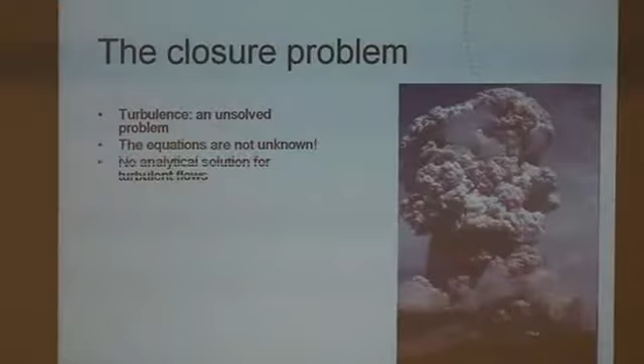Okay, I jump over some first slides. I think I will start by talking about the standalone linear eddy model. Some of you know a little bit about it, but I think it's good to have a background on that. And then I will continue with presenting the new model framework, which we call the LEM 3D. First, in a simplified version with constant density. Maybe we can look at some non-reacting test cases, but more interestingly also look into the non-constant density mixing reaction model.

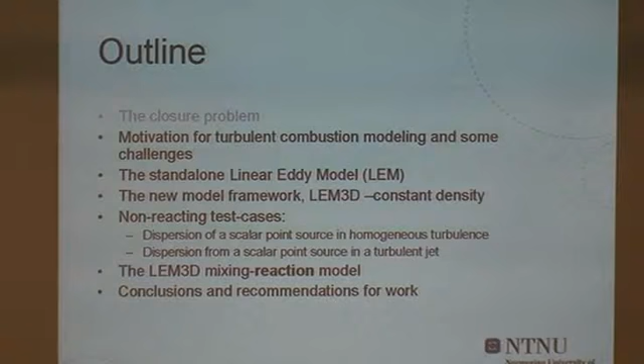So why turbulent combustion modeling? Okay, we can skip this one. Some of the challenges in turbulent combustion modeling you have already discussed. One thing is that the small scale structures are very important, because that's where the reactants are mixed and the reactions occur.

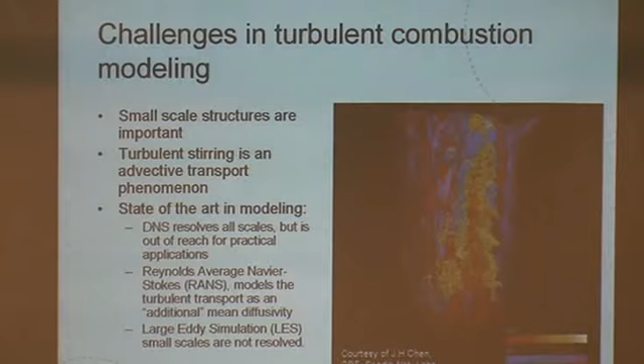Turbulent stirring is by nature an advective transport phenomenon, but it's often modeled as a diffusive process. So either in RANS, where you model the whole bulk transport as an additional mean diffusivity, or in LES where you resolve the larger scales, but the small scales you still treat with some kind of diffusive mixing or transport model.

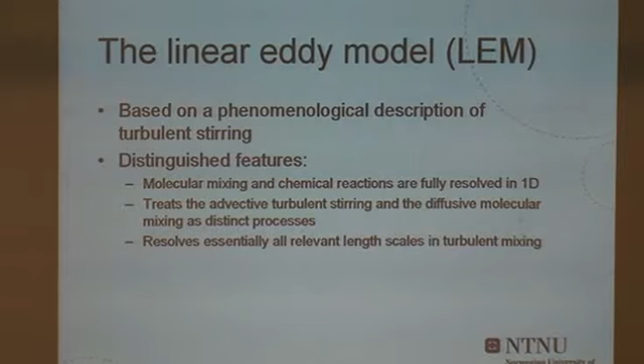So the linear eddy model, contrary to the standard models, is based on a phenomenological description of turbulent stirring, so it's not directly from first principles. But the distinguishing feature of the model is that molecular mixing and chemical reactions are fully resolved in one dimension, down to the Kolmogorov scales. And the turbulent stirring and the molecular diffusion are treated as separate processes. Essentially it resolves all relevant length scales in turbulent mixing.

So some more details on the linear eddy model. It has basically two main components. The first is the one-dimensional mixing reaction equation for a general scalar, written as this. What is phi? No, phi is a general scalar. It can be temperature, it can be mass fraction of the species. Is this D_m molecular diffusion? Yeah, that's molecular diffusivity. And the last term is a source term, so chemical production.

You don't have here flow, an advective term? No, the model has no advective part in its basic form. So that's something you have to add to the model. Oh, I see. But this is supposed to be calculated between mesh points, basically? Yeah, this is implemented on a regular 1D domain. But between mesh points in the 3D simulation mesh? Yeah, well, I come to that.

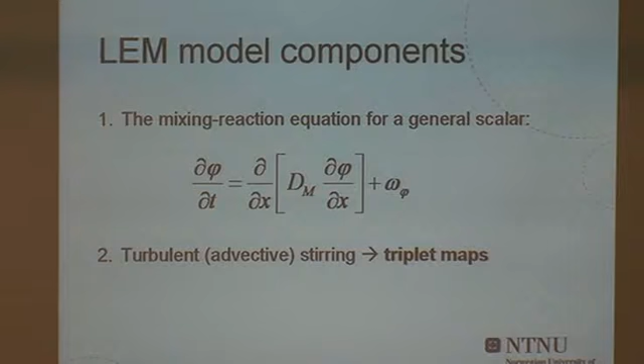The other contains some advective part, and this is the turbulent stirring. This turbulent stirring is implemented by so-called triplet maps, and I will explain what they are in the next slide. So imagine we have a linear scalar gradient, which is this black and red line, and we perform a triplet mapping on a section of that gradient on that domain. We do the following.

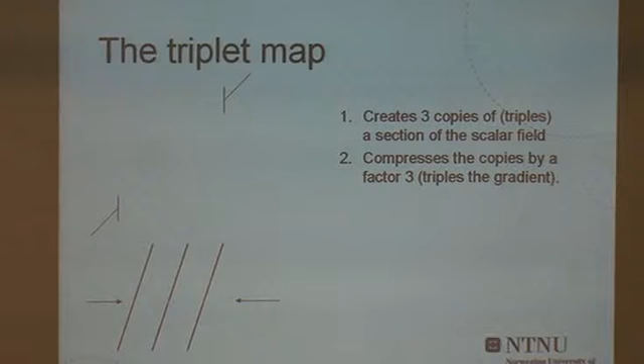We create 3 copies of a section of the scalar field, like this, and then we compress the copies by a factor 3. We triple the gradient, and then we invert the middle copy, and of course put it back again on the domain. By this we have a conservative mapping. It conserves the property that we have, and it's also continuous.

So in such a way you model the velocity field, which contains several components like rotation, shift, and others. Yeah? And they're independent random processes or what? In this way, you model the turbulent flow. Of course, not the large geometry-dependent structures, but what is in the inertial range and below is modeled.

But these ingredients like rotation, like shift, are they independent of each other, or how many random quantities do you have here? Oh, this is for a scalar only, no? Yeah, this is for a scalar only. For the number density, or whatever it is. A scalar.

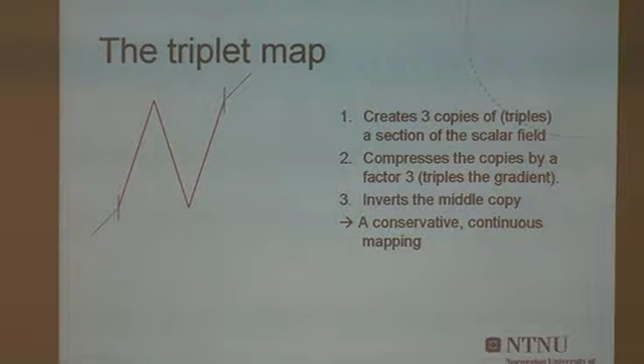So the idea primarily is to increase the scale. So the physical interpretation: increase the distance between the two points. So the shear layer is not infinitely thin, but it's thicker, and you adjust it to what you want in a conservative manner. So it emulates the compressive strain and the increase in scalar interfaces caused by three-dimensional turbulent eddies. That's the idea.

And physically, you have some history effects. In what way? The history effect. So in the linear eddy model, there is no direct history effect. There is a version of the model called the one-dimensional turbulence model, where you also have the velocity change. You do this triplet map with some frequency. What is the frequency? The frequency is dependent on the turbulent diffusivity and also the distribution of the eddies of the turbulence spectrum.

I guess you're going to explain that later or not. Yes, I will go into some details. Yeah, so therefore, please continue. So we wait. Okay, it's better to wait.

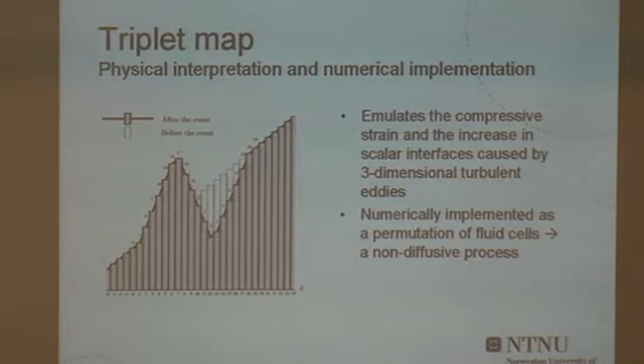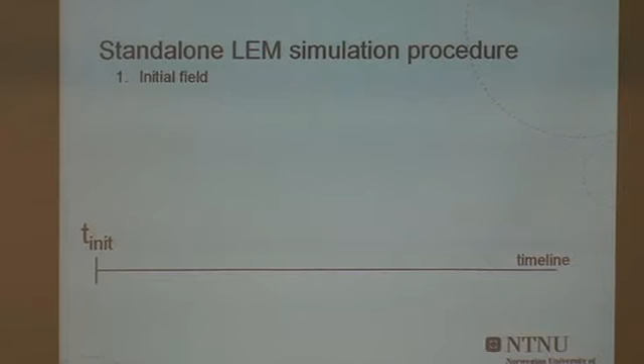So numerically, this is implemented as a permutation of fluid cells, and in this sense, this is a non-diffusive process. So in this way, you don't mix or do any diffusion by the turbulent stirring. So this is just to show you how this is done in practice. Let's say that you have your 1D domain. This is the timeline. You start with some initial field.

The next thing you do, you sample the time for the next triplet map, the stirring event. You sample this from a Poisson distribution. And the rate in that distribution is dependent on the turbulent diffusivity and also the distribution of the eddy sizes. The turbulent diffusivity depends on scales of eddies. You speak about the turbulent diffusivity at the maximum scale of turbulent motion? Yeah, overall, in a RANS frame. So you have diffusivity and you have the integral length scale. That gives you a time scale.

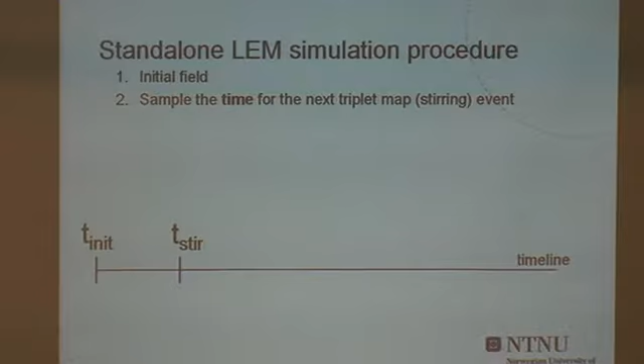Or am I wrong? Not simply that, because you have a distribution of eddies. So you look at the mean or what? But you assume here a Kolmogorov scaling, right? Yeah. So that's how you find the distribution between the eddies. Assume that you have a Kolmogorov scaling, and then you know how many eddies you will have at different scales. And in what sense is Kolmogorov introduced here? You have the turbulence intensity, which tells you the level. Well, it's the Kolmogorov spectrum, but how is it realized here? Well, let's wait. Maybe, because I haven't put many equations in this presentation.

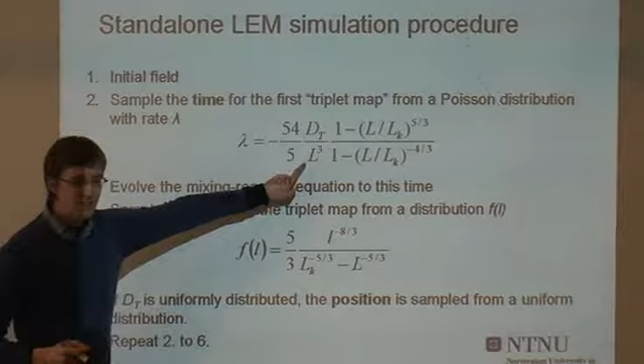If you don't mind, just a second. So this is the event frequency parameter, and this has a unit of one per second and length of the domain. And this is the integral scale, this is the Kolmogorov scale, and this is the RANS turbulent diffusivity, and this is derived from assuming your scaling and so forth.

Okay, so what you do is you sample the time for the triplet map. You evolve the mixing reaction equation to that time. And then you sample the length of the triplet map from a distribution which resembles this. And if this diffusivity is uniformly distributed, you just sample the position where the triplet map should be implemented from a uniform distribution. And then you repeat this and run it as a Monte Carlo or stochastic simulation. And then I can go back to the other presentation.

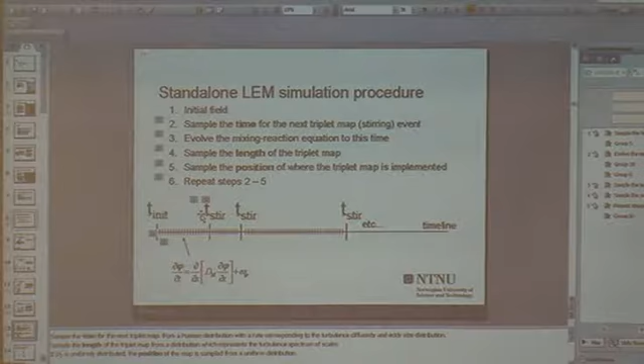Just one quick question here. So you choose independently the time of stirring? So there is no correlation between events. The events are chosen randomly without any correlation in time. No, there's no correlation in time between them. That's right. But it's not physically correct. No, this is synthetic velocity.

But for me, if you model correlation in space with Kolmogorov, it's practically the same time scale in time. In the framework of this model, you can do it. Of course, this is synthetic velocity, it's not a law. Yeah, I agree with you. Nonetheless, there's no correlation. Okay.

I can make a white noise. A comment: as I said, there is another version of the linear eddy model called one-dimensional turbulence, and in that model you also carry the velocity field, and you have some history effects. There you will have some correlation with that. Yes. Okay. But I'm not an expert on that model, so I will encourage you to ask the questions to Alan when he arrives.

In the limit, if you play on the number, you would see that altogether it's dt divided by lk cubed. So if you look at L much bigger than lk, then it means that the model is based on the Kolmogorov length scale only on one hand, and then you have eddy diffusivity on the other hand. It sounds like putting together two animals of different origin.

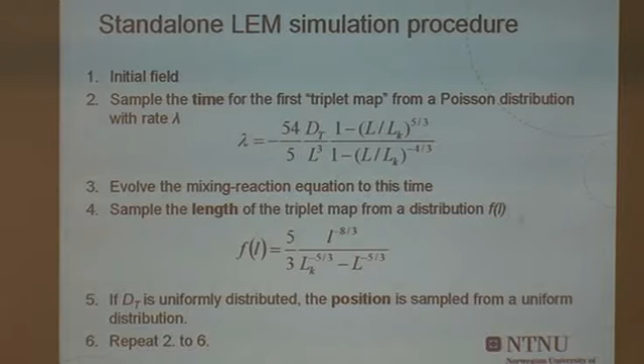Well, I'm not sure if I can answer that. Next week we can continue discussions. You can ask Alan Kerstein. Yeah, sure. He's coming.

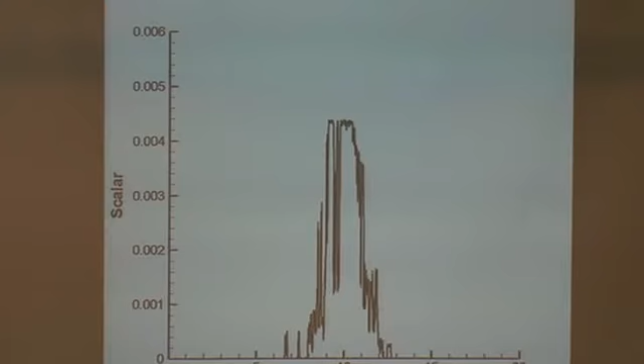Okay, I have this slide just as a demonstration. I run a mixing of a point source. It's a 1D domain, and at t equals t0 I have a point source, and then I see how the model spreads this point source out. You can see that you have different events at different times, of different sizes, and you see the effect of molecular diffusivity, how it smooths these events out.

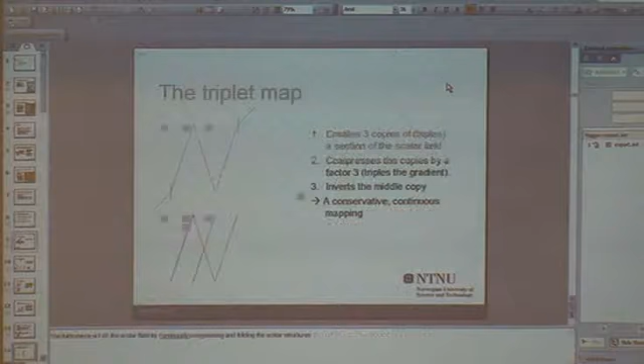In the equation there is a source term? The source term is not present here. Zero, just diffusion, no source term. But no molecular diffusivity coming in? Molecular diffusivity is included. Where, in which part of the equation? It was in the original equation, the mixing equation, the very first equation. Yeah, this is X1, the index. Okay.

What is strange is this picture. In reality, even for isotropic turbulence where the mean velocity is equal to 0, we have some advection effects. So it's not only this, but also some movement from right to left, and here there is no movement. Here mean velocity equals 0. Even if the mean velocity is equal to 0, there are some fluctuations. We have the fluctuation from left to right.

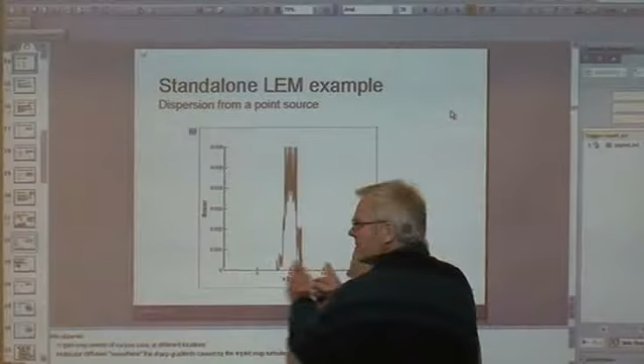This is the evolution of the mean field, the mean number density, for example. No, it's not the mean field, it's the instantaneous field. Yeah, it can be interpreted like that. But there is no such element in your test case.

How does the root mean square value evolve with time? What kind of process do you have? Do you have t to the three halves, like turbulent diffusion? Well, I haven't studied that in particular, but there is a paper where he looks at spreading of heat from point sources and line sources, and he gets the turbulent convective range first, where sigma goes like T, and then later like the square root of T.

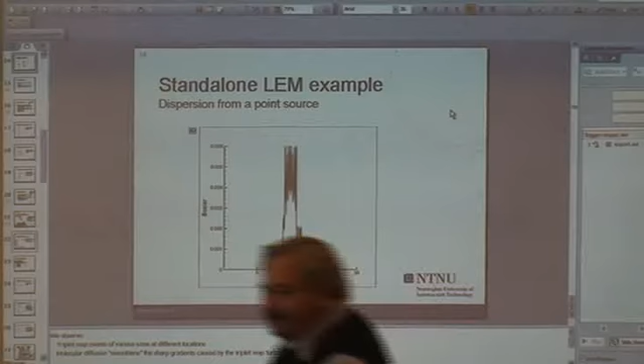It has been able to reproduce that quite well with this modeling, something similar. There are some artifacts. You need some tuning of the parameters, of course. But there is one artifact with the model: turbulence is a continuous process in time, but the triplet maps are instantaneous. You're lacking a time scale for that. So that produces some artificial effects, especially close to a source.

But this is just one scalar flow, homogeneous turbulence, one scalar starting as a point source. The condition is not clear for me.

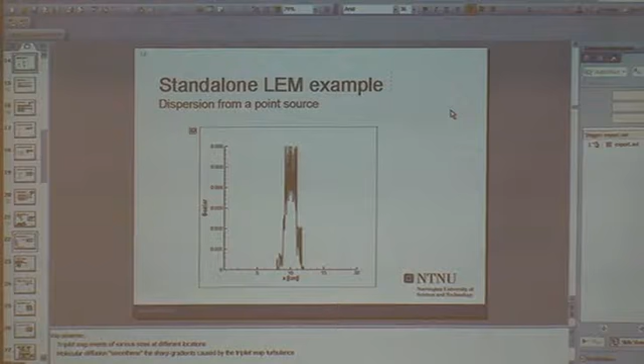What I say, for example, from the very beginning, you have a very thin mixing layer, okay? And this mixing layer is convected by the other vortices. So the picture is not like that. In the equation, he doesn't have the term u nabla phi here. So we have to model this. Yeah, of course. So this is usual diffusion, that's it. Usual diffusion with a given velocity. I understand that, but if you don't describe this moving, what do we have in the general case?

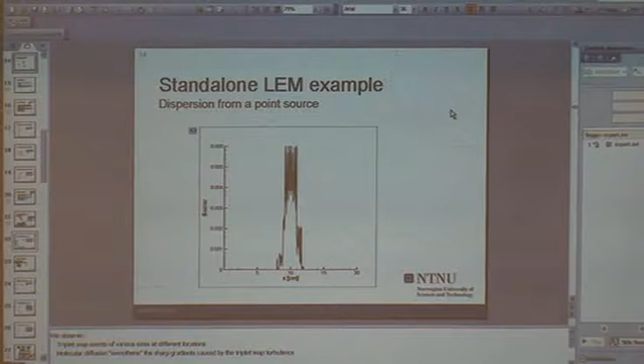I ask him and not you, because he presents the model, the idea. I want to understand what is behind this idea, without interpretation. Okay, we can speak after. Okay, but for me it's not clear. Maybe you have some explanation.

Do you have this information from the very beginning? Yeah, I think I can, but not right here now. But this model, in fact, models this flapping. Sigma goes as t, so that is a flapping or meandering process. That was the result of the model that he just explained. Sigma goes as t at first, so that is exactly this meandering that is modeled. And then later it goes like a turbulent diffusion process.

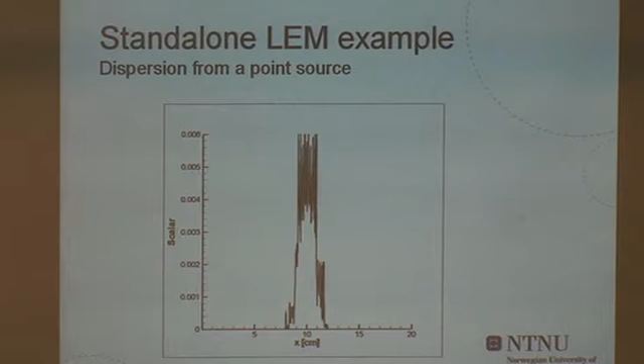Yes, of course, but I can't see it here. You can see this probably as a mean of many kinds of realizations. Another important point is that this is not a DNS. This is a stochastic representation of what the turbulence does. So we should probably not look at this and expect to see what we see in nature. But if you don't reproduce this flapping... Well, it does. It should reproduce the statistics of the flapping process, that's the point. Okay.

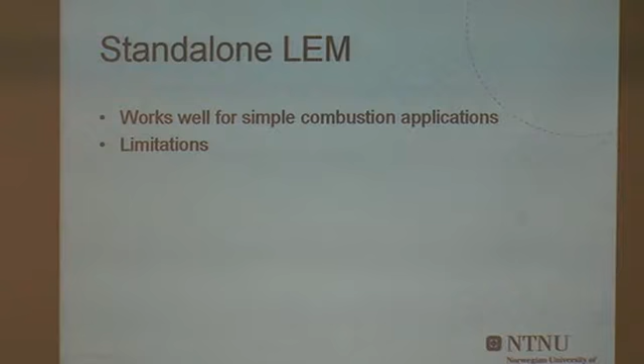So here I claim standalone LEM works well for simple combustion applications. There are several papers on that. It has some limitations, and one is that large-scale geometry-dependent flow structures need special adaptations. You need to do some tweaking, and as a result, a linear eddy model in standalone 1D mode is limited to rather simple flows. And as we already talked about, a linear eddy model contains information about the scalar field only. So flow field information must be provided.

I'm not exactly sure what you mean by standalone. Yeah, good question. Standalone is contrary to what I will present, the 3D where we couple several. So standalone means you're actually solving just a one-dimensional problem. Yes, that's standalone. I agree that it's a bit confusing.

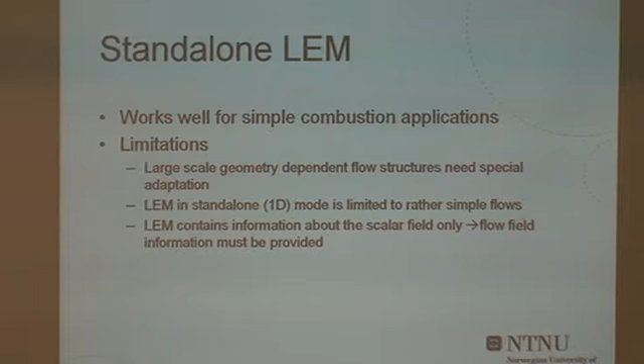And then, is there any particular scale where you have some difference between the full equations and the LEM equations, which are of course not the full equations? Do you resolve the full equation at all scales? So how many mesh points do you have? Where's the cutoff in scale? I understood that you have a one-dimensional model with a reasonably coarse-grained mesh on which you solve the full equation, this advection term, and then on smaller length scales... No, it's not exactly like that. I think I will just proceed and you can see if I manage to answer your question.

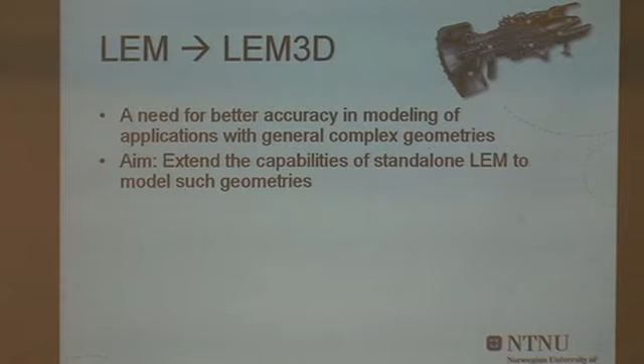Okay, this is more background. So the aim of our work has been to extend the capabilities of this standalone linear eddy model to more advanced geometries and more advanced problems. And we have had a guideline for this: we wanted to maintain the strict distinction between the mixing and the turbulent stirring, which is inherent to the linear eddy model. So we would try to avoid, for example, implementing the mean flow advection in a diffusive way.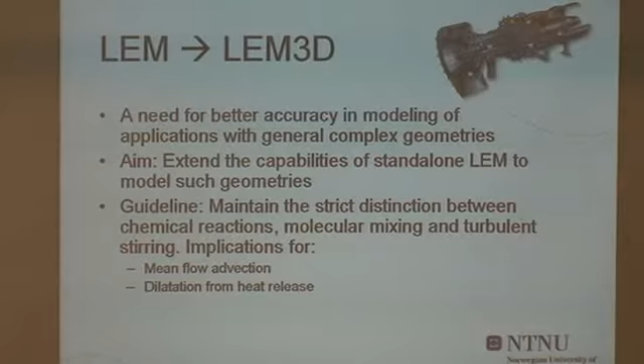This has implication for the mean flow advection, and also when we have some chemical reactions, to the dilatations from heat release expansion. So, okay, this is how the model is constructed. This is a single standalone linear eddy domain, and it's discretized in a number of wafer-shaped control volumes, wafer-shaped like this.

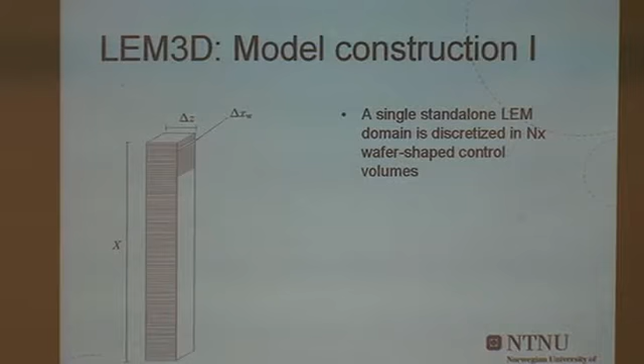Yes. Just, are you? I think I know what standalone means, but I just want to verify. By standalone, you mean that you get the velocity field from somewhere and use it in your LEM standalone model, but you don't feed anything back, right? Oh, maybe I should omit the standalone expression. It confuses. But what I mean here is, it's just the 1D model as I have presented it, as opposed to the 3D model that I'm gonna show now. Yeah. So, that's good feedback.

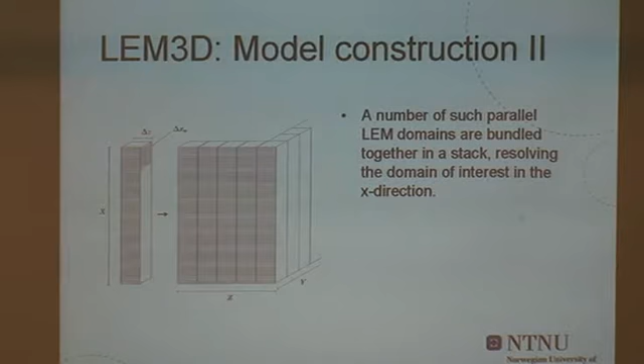So, thank you. And then further, a number of such parallel LEM domains are then bundled together in a stack, and then we resolve the whole domain of interest in one direction, let's say the x direction. And similarly, we resolve domains in the y and the z direction in the same way. And where the domains intersect, we define a supergrid of 3D CVs.

So, yeah. What is it, supergrid? Well, if this is the grid that resolves the 1D domains, the supergrid is a grid larger than the fine resolution, and this is the cubes that you can see here. And these cubes are the points where you have the mean things, right? Yes. Between velocity and thermal diffusion. Right. How they intersect? It's in a virtual sense, it's not real. No, it's real. So that's really how the model is constructed.

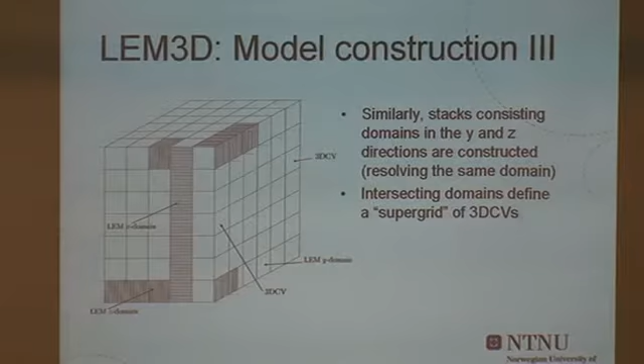Depends what you mean by real. Because your triplets are independent in each direction. Yes, it's like that. Yes, they are, sort of. When you draw, what do you do? You have 3 directions. In each direction you do a triplet. And how do you combine them? Okay. It's not clear from this screen. So, okay, this is details about how the mean flow advection is implemented.

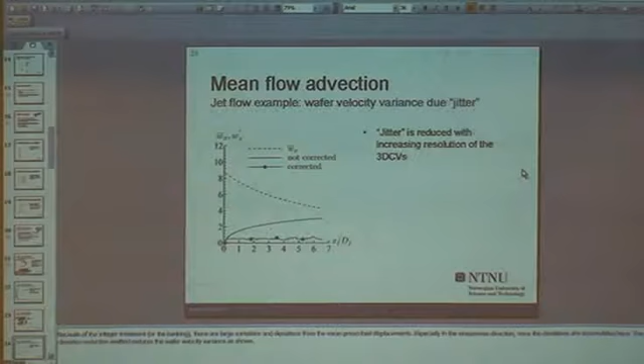Okay, so with the three domains, you can say that you have resolution in the three directions. They are not coupled by themselves. Not coupled. But to introduce coupling, we need coupling between the directions. We do, and again I will say it's a stochastic model. But how? We do a rotation of these 3D CVs, and then you have 6 different options for rotation. So in that way, you couple the different directions. Some animation maybe.

So, why do you say 6? First of all, you have 3 directions, but altogether with nearest neighbors in the box, you have 26 directions. So why do you say 6? Well, you have 3 axes, and for rotation you have 2 directions. That you can see. But okay, you combine 6 fields. No, you combine 3 fields. But they are different. Yeah.

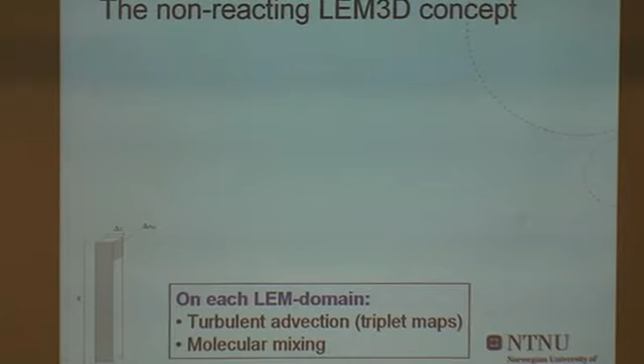So, okay, I can try to summarize the non-reacting LEM 3D concept. On each LEM domain, you have the turbulent advection and the molecular mixing, and then we have the LEM 3D structure, where we perform the mean flow advection of scalars, and we also have this rotational coupling of domains.

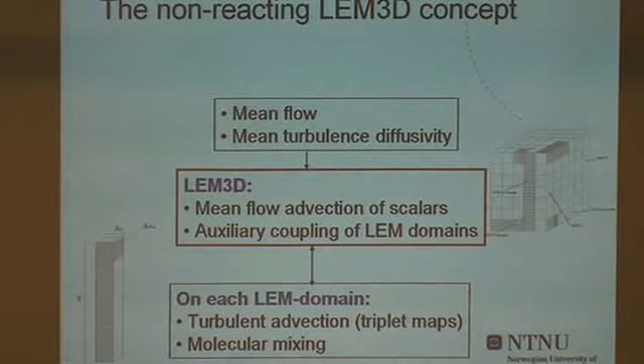And to have this going, we need as input a mean flow field and also a mean turbulence diffusivity field. So a mean flow field to advect the scalar, and the mean turbulence diffusivity to drive the processes on the domains here. In general this can be provided by different other models like RANS, LES, or even from measurement data if you have a stationary problem, or DNS. That's the non-reacting concept.

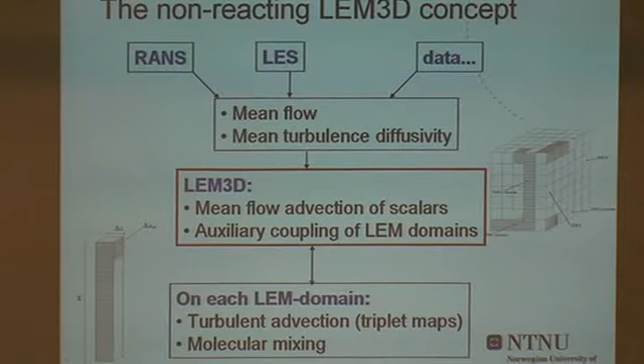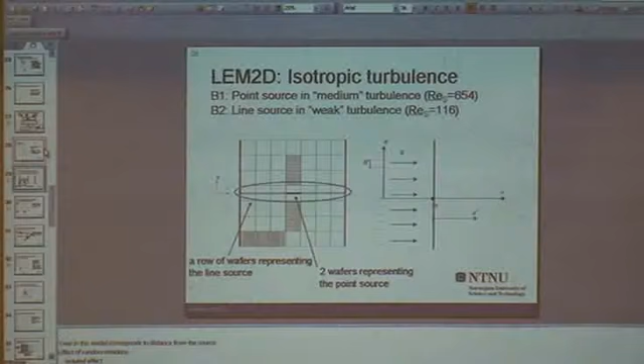Okay, so I'm not sure if I should go in. I don't think I will go in detail on all the results. Of course, I spent a lot of my PhD investigating different properties, what's working and not, and especially these rotations, which is something new.

Here you have two random processes. One can model molecular diffusion, just Brownian diffusion. An additional random process is a random velocity field, which can give you turbulent diffusivity and transport coefficients, in principle, in this system. So here you describe two processes. One is Brownian diffusion, a trivial random process, which a Wiener process can describe. Maybe you describe it in a similar way.

But also you have turbulent flow, and turbulent flow can give you turbulent diffusivity, and it can also give you mean flow if you average this field. But you also have additional information about the mean flow from LES, RANS, and data. What does it mean? It means that you get the average mean flow and the average turbulence diffusivity that you need to drive your models, which give you the small scale behavior.

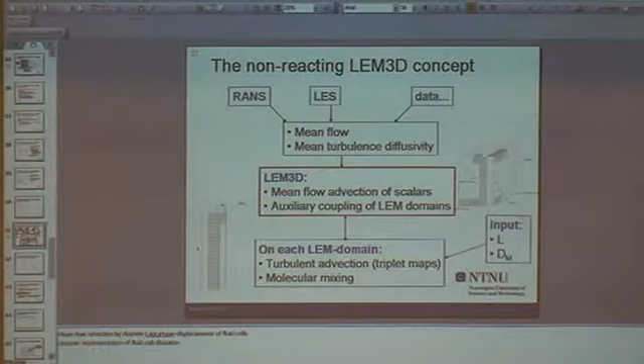So, I think I will just go to show the principal idea behind when we extend the model to reacting applications, because then in addition on each LEM domain we will have chemical reactions, and these chemical reactions have some resulting heat release and dilatations, and they are taken care of more on the LEM 3D level, and of course these altogether result in a density field which feeds back to the flow solver.

So this means that the whole model must be run with some kind of iteration in between. In our case, it's for the moment only RANS. So you need some kind of iteration loop to reach steady state.

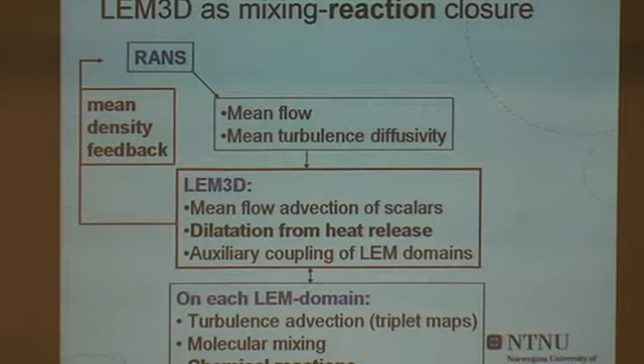Your RANS is semi-compressible, I suppose? It's incompressible. Otherwise you get temperature. Oh, okay, semi. Density is a function of only temperature, not pressure, with pressure correction. So I'm not sure if I will go into more detail on this now. Of course, we can discuss more.

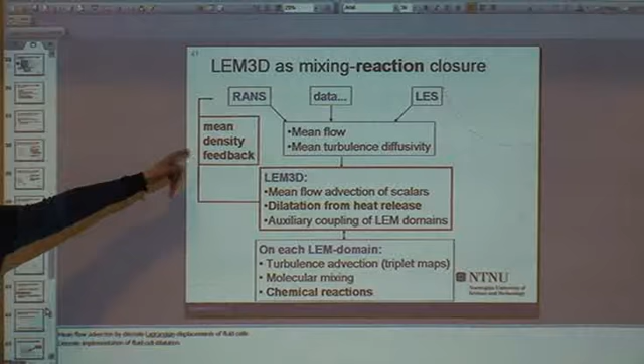So with reaction, you use the same triplet? Yes, those processes are basically the same. In addition, you have some kind of dilatations. So there is no effect of expansion or dilatation on the triplet? No direct effect. It's an indirect effect, because the mean density field will probably affect your mean turbulence diffusivity field. But it depends on, for example, the mass loading parameter.

You have here in some sense two-phase flow. You have fluid flow and you have particles or a passive field. So there is back reaction of the passive field, or this scalar field, to the flow only if, for example, the spatial density of particles is of the order of the fluid density. In other words, if there are a lot of particles, they can affect the fluid flow. If you have a small number of particles, this is like a passive scalar.

But you introduced back reaction of the mean density. Yes. This is density of what? Fluid density? It's fluid density. Yes. And so because these cells contain a certain amount of mass, they are like fluid cells. But you have a continuity equation for the fluid.

Yeah, but the point is that as it heats up, it will take more space, right? And then it creates more LEM cells. Yes. So you introduce more LEM cells all the time, which makes the whole thing expand. So it's continuous. You conserve mass, but not volume. That's basically what it means. When you increase the volume, you feed that back after some time.

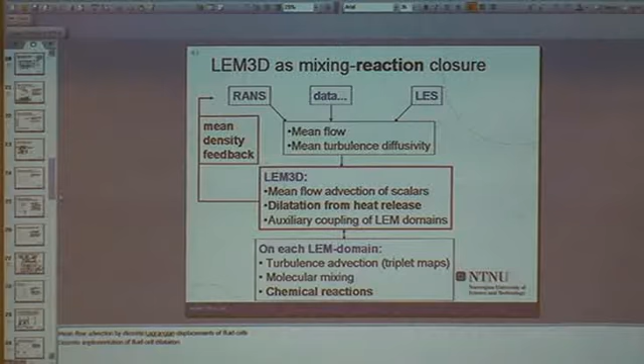How about validation of this compared to direct simulations? What is the status on that? That's actually still on the list. We have run some validation with an experiment. Too many slides. Okay, so the points here are the experiments, and the case is... Why not just show the slide?

Yes. So what I've done here is run LEM 3D with the velocity field and the turbulence diffusivity field input from the experiment, and I've run with different integral scales. You mean cutoff scales? No, the large scale. That's an input to the linear eddy model. What do you mean by large scale? That's the largest eddies, right? It's the integral scale, basically the largest eddies.

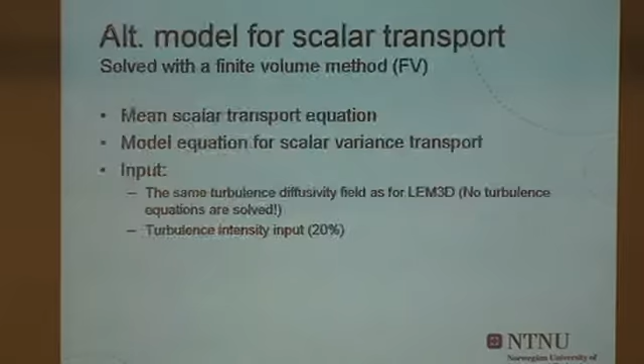And in one way, Axel is right. It's one physical problem, so maybe I shouldn't change this. But what is the difference of curves? And then we go back to the curves. This is 114. And that's half that, 56. And that's 28. And that's 14. So we can conclude that the flapping is not taken into account in your model.

So this is a link with the flapping. Why? Here, you change only Reynolds number. No, it changed integral scale. Yeah, and Kolmogorov scale is fixed. So in some sense, he changed Reynolds number. Bigger integral scale, more important flapping.

Okay. So maybe it's not so important for fish, but for us, for example, if you live nearby one chimney with pollution, you can die. If you calculate like that, you can die. You agree or not? But I mean, this only shows that the integral scale of the experiment is not set, right? I explain what I mean here.

Because when you have a very big integral scale in comparison with the diameter of a jet, you will have flapping from the very beginning. Right, exactly. But in this experiment, it probably was not a big integral scale. So we don't know if it works or not, because it was a different comparison. If I look at the experimental data, I saw that the integral scale is much bigger than this one. I have experience with jets, so I saw that.

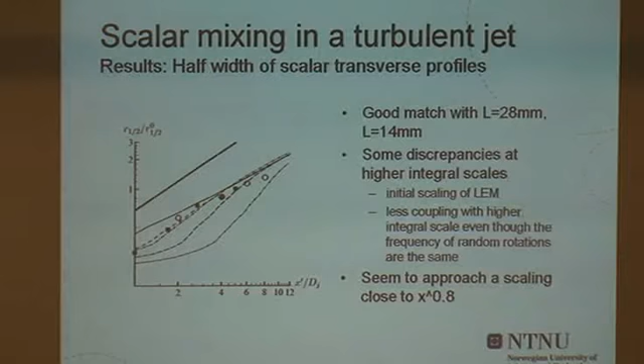I see from these curves that if the integral scale is very small, it's okay. As the scale is growing, you have the flapping. So the model doesn't describe this physical phenomenon. Oh, but the experiment had the same integral scale always. Well, I guess in reality the integral scale grows somewhat; you have forced integral scales just as a parameter study. And this one is probably not realistic to include, but what is reported?

What the experimentalists report as their integral scale is 28 millimeter, and that is taken as the half width of the jet where the point source is inserted. They measure the integral scale of turbulence? In this experiment, the way they measure it is by taking the half width of the velocity field at the point where the point source is inserted.

So this is the integral scale. Maybe this is not correct. Usually in these experiments, when you would like to measure integral scale, you have a velocity field, you measure the velocity field, and you calculate 2-point correlation functions of the velocity. And these 2-point correlation functions allow you to determine the integral scale from experiment. Yeah, they haven't done it. I agree, but they haven't done it in a very rigorous way.

Very often people use even just the nozzle size as an integral scale, which is of course not always correct. But in the jet it is proportional to the half-width. Yes, of course it changes with distance. So it makes sense to also take turbulence, or at least a fraction of it. Turbulence usually exists far from the nozzle, not close.